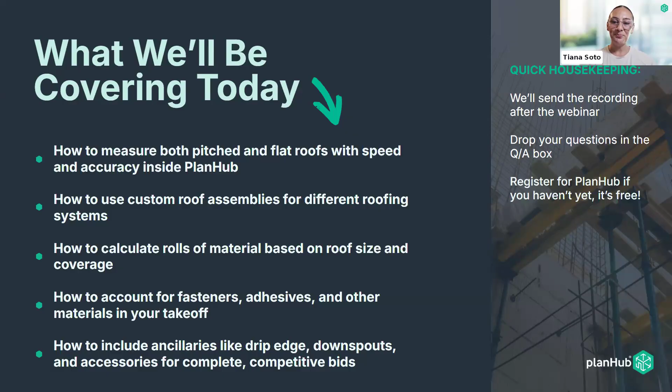So let's go ahead and get right into it, Greg. I'm going to pass the baton over to you. Thank you very much, Tiana. Just want to take a moment—if this is your first webinar with us, we launched a new series back in September, and she has brought so much creativity and energy to this process. From the adoption support team, we express our gratitude.

All right, let's get started here. I'm going to pop over—I've got a couple of projects pulled up. We're going to be focusing on two different areas, specifically for roofing takeoffs.

We're going to be looking at a low sloped flat roof. That's the plan page you see right here in the window, and this focuses on a convenience store. It does have a low slope—a quarter inch over a foot, pretty typical for a commercial flat roof structure. And it is going to receive a TPO system, one of the synthetic membrane systems.

We are going to be charging for and measuring numerous components of the system. For instance, we'll have to measure the main roof area for the overall cover board, as well as the ISO board to achieve that R38 insulation rating as requested by the plan.

Some other things we're going to talk about: we'll look at the different pages of the plans we need to reference for additional information. We may or may not need to measure directly on those pages, but they're critical in helping us understand the structure and how to measure so we can get our estimates done quickly and correctly.

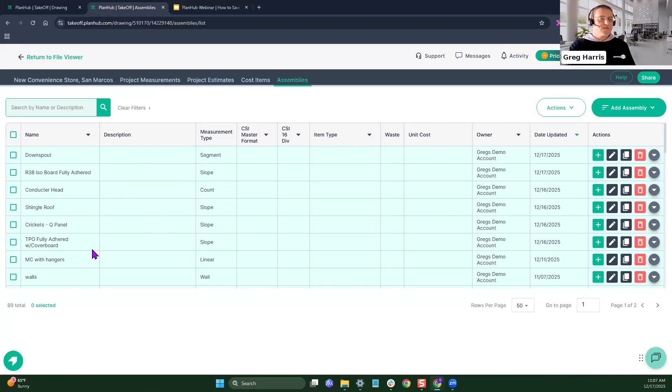We'll also help you with those assemblies. We'd love to get you started down that road—help you build them out, understand how and why the components are included. I've already got some built for this particular application. I'm going to pop over and give you a little preview. Our assembly library in this demo account is comprehensive, so we're only going to use about the first 4 or 5 assemblies on the list for this TPO system.

These are custom built ahead of time, and they do have the components in there. They're pretty common—if you're roofers and contractors, you're not going to be a stranger to the materials you see on this list. We're talking about the rolls of TPO, the cover board, the fasteners for it, and the plates, those little incidental components that have to be part of it.

Estimating those and performing takeoff to get the measurements for fasteners and plates, et cetera, is very time consuming. And if you're doing it by paper, by hand with a ruler and a pencil, oh my gosh, my heart goes out to you—I can't imagine doing it that way in this day and age. But I know there are still companies transitioning over, and they actually love the product when they see it because it's a huge time saver.

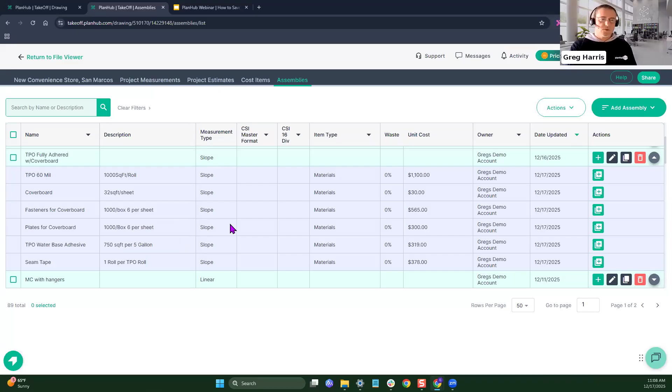It takes a little bit of effort up front. You meet with us, we talk to you, and we'll get you on board and rolling with the trajectory you specifically want for your company's goals. So specifically for this TPO roofing system, we're going to measure some very specific things. First off, we have to get a dimension of the overall surface area that's going to receive the main roof TPO.

That's also going to be the dimension that's going to be receiving the cover board and the ISO board that will achieve that R38 as requested by the project.

On that same surface area for the entire main roof, we can also calculate the amount of seam tape we need for joining these rolls of TPO when we have to stretch out multiple rolls together. You got to seam tape it. We also have adhesive for all those edges and up to parapet walls and things. This one is fully adhered, so the adhesive is actually going to cover the entire surface area. So again, that one measurement we're going to perform, we're going to calculate multiple materials off of that same measurement. There'll be others we need to perform along the way.

We also need to charge for the conductor heads for the scuppers that are going through the wall to catch that water off of these crickets toward the back of the building. We also have downspouts connected to those conductor heads. We're going to need to charge for those as well.

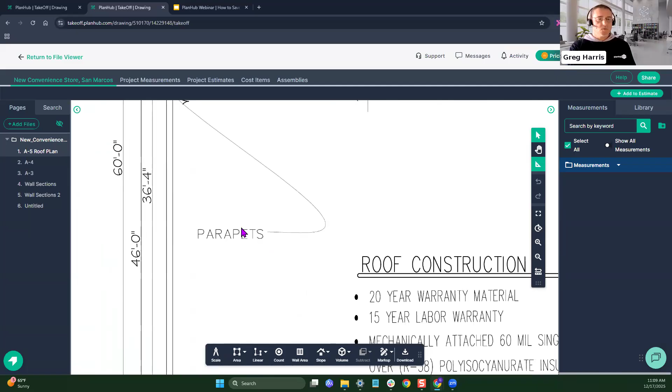Another feature we have to be concerned about is the parapet walls. If I zoom in here, you can see that every wall is marked as a parapet wall, around the entire structure. We move around it, every wall is a parapet. So commonly we have to be concerned with the heights of these different parapet walls, and it is common to have different heights of those walls on the same structure. You can have them anywhere from 12 inches tall all the way up to this one.

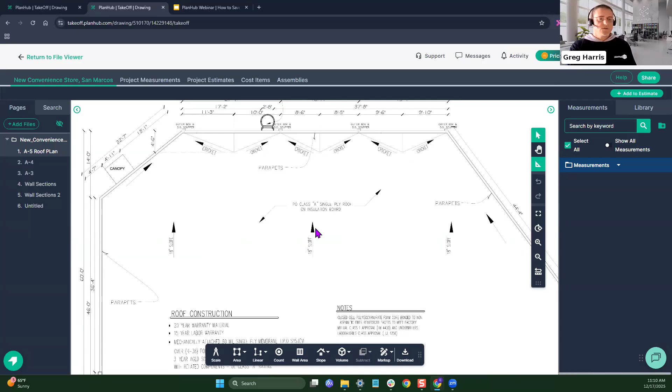Actually, the tallest is 9 feet, I believe, and I've seen it all the way up to 20. So it can be many various sizes, and we can accommodate those sizes in the assembly with you. We can build in multiple options for different parapet heights, so they'll all accumulate in and give you one sum total of product. That's the goal: take a measurement, get the measurement pushed through the assembly, let it calculate the conversions for you, and then return quantities of products and prices of them because we've already programmed this ahead of time.

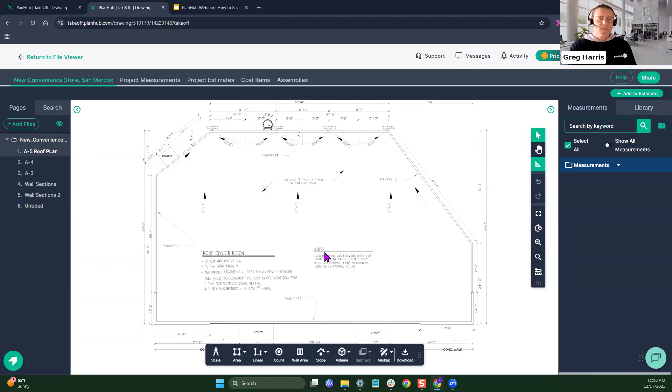So for this example, we're going to get started measuring right away. First thing we have to do on this page is find the scale printed by the architect. This roof plan says it's 1 inch equals 6 feet. That's a very odd scale on this particular roof plan.

Let's double check down here in the title block. Yep, it does not address scale there. So we're going to be going directly off of what the page is printed at. However, that being such an unusual scale, I'm going to calibrate a scale to a known measurement instead. I'm going to choose this 11-foot measurement right back here. That dimension line is 11 feet between these slanted hash marks.

And we have a tool down here on the toolbar. That scale button is the first one, so I'm going to click that to get started. If this were a common scale that we could find on any plan, we would just simply click the menu, scroll up or down and find the scale that matches and select it with a click, then verify it with a ruler to make sure it's accurate for the page.

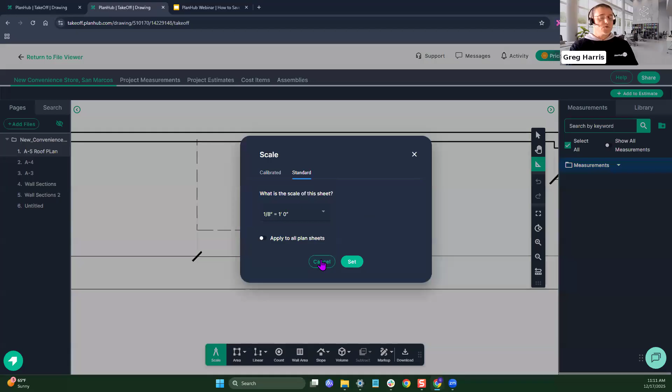In this instance, though, this is an unusual scale, so I'm going to go straight to calibrated. I'm going to tell the box here that I'm going to draw a reference line that is 11 feet long, because that matches that known dimension behind me on the page. Then I click set to get started.

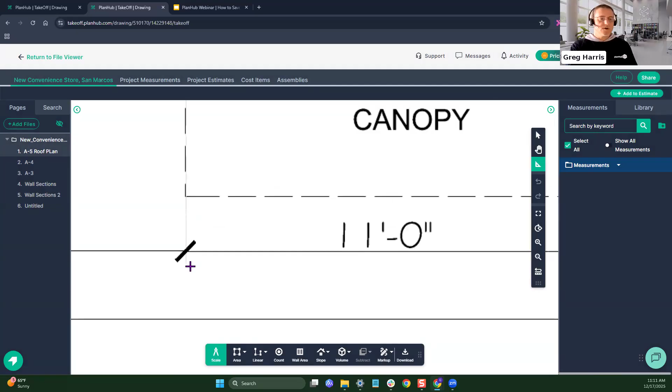I'm going to get a crosshair for my cursor, so I'll line that up with the beginning point of this 11-foot measurement, center my cursor on that line and click one time. That now follows me in whatever direction I go. I'm going to move straight to the right, dragging that page with a right click and drag on my mouse. When I get over to the endpoint, I'm going to make sure I've got it lined up in the center and click again.

So that calibration line, when you click to start and click to finish, sets the scale with this being the definition of 11 feet in pixels to the computer. It can now convert any other measurement we perform using that same conversion factor calculated off of this calibration. Now, to verify the accuracy, you could use the same measurement. That green line's in the way just a little bit, so I'm going to scoot around.

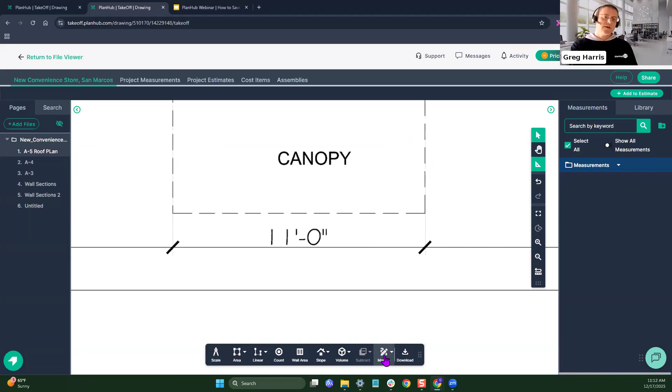Let's find, there's another 11 foot right there. I'm going to use this clear 11 foot to verify, and I like to verify using the ruler tool. That's a dimension drawing tool that's buried in the markup button. So I'm going to click there and then click ruler to launch.

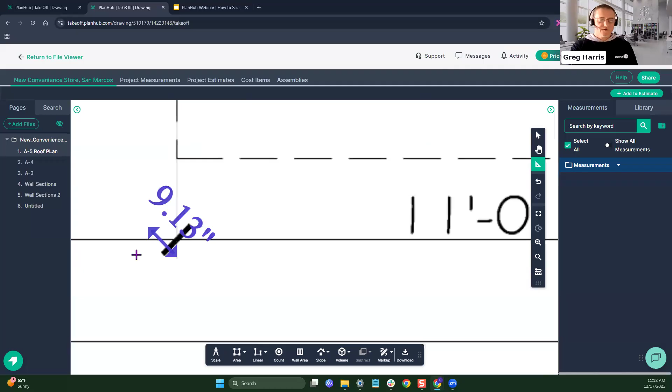I'll get a crosshair from my cursor again, and I'm going to do the exact same procedure I did for the calibration line. I'm just going to center on the beginning point and click once. That follows me now, so I'm going to move straight across the page to the right, clicking and dragging with the right mouse button as I go. And then when I line up at the end point, I click again.

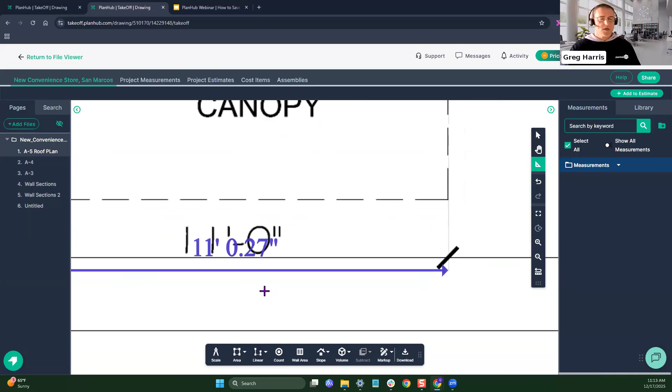And we're within a quarter inch over 11 feet. Honestly, if you're within an inch, that's good to go because that could just be quibbling over where you began and ended on the beginning and end point on those lines. So if you're within an inch, you're good. If not, you might want to recalibrate, choosing another known dimension, maybe a little longer, to try to get it zeroed in even closer. That is good to go for our purposes, so we're going to leave it set exactly as that.

So now with the list of measurements we're going to be measuring for, number one is that main roof area. We're going to be using the slope tool. It is a tool that is designed for roofing applications. If I open it up by clicking slope, you have options of how you can use it.

Line is for if this were a sloped roof, and we will be using this line later over on the sloped roof asphalt shingle project, because that has some ridge caps, and those ridges are going straight up that 6:12 roof pitch. So we need to add that dimension into our slope tool so we get an accurate measurement instead of the 2D measurement. It allows for that third dimension of the rise over run.

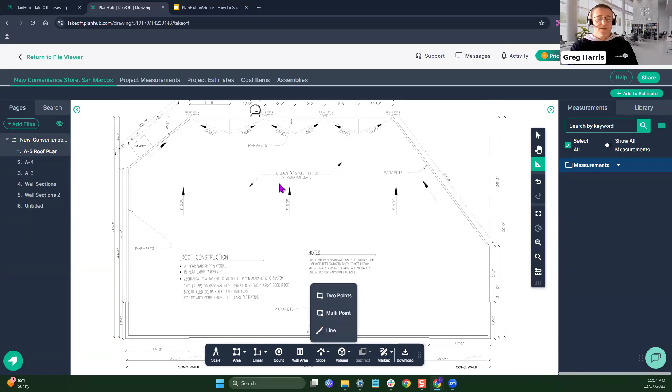We will be using the multi-point for this particular plan because it is not a square or rectangle. The 2-point, by the way, if you do have square rectangle buildings, you can measure the area with just 2 clicks. It's that simple. This one is a little odd shaped, it is not a square rectangle, so we're going to go to multi-point and click there.

Next, we're going to name the tool. I'm going to call it main roof. Oops, actually, I'm going to change that. Let's call this TPO system. The reason I'm naming it TPO system instead of main roof is because this, when we use it with the assembly in a moment...

That assembly header is going to pick up the name of the measurement we choose to begin to launch that assembly with. So I'm going to name this tool something that I want to see that assembly named in my estimate page later when I use it. So I'm already thinking ahead about how I'm going to use my assemblies, what measurements are contained within them.

As you're probably picking up on it, getting those assemblies built out ahead of time is a huge time saver for you whenever you use them in a project. But that assembly is sort of driving my trajectory, or driving the direction I'm going to go with my measurements. So I'm going to call this TPO system.

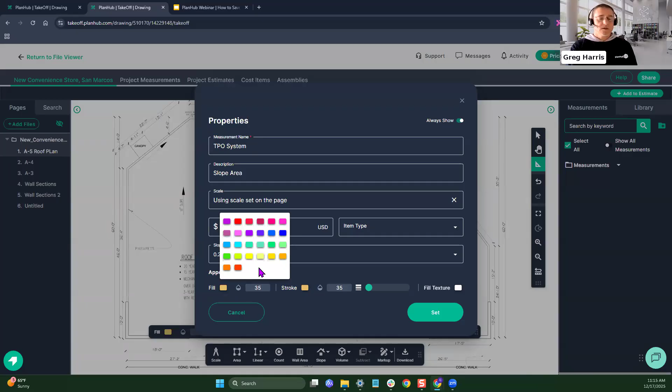I'm going to drop down to the slope factor box, click there, scroll all the way up, and this is a 1/4 inch over a foot, or 0.25 over 12 slope for this particular one. I can also check my colors here in the appearance section. You can click the box and choose any other color from the palette. I like to choose nice, bold, bright colors that are easy to see while I'm working. And this orange is going to be very nice for us.

We'll be able to see it, so I'm not going to change anything there. So really at the end of the day, to get started, I name the measurement, chose my slope factor, check my colors, and then click set. Now we're ready to start measuring.

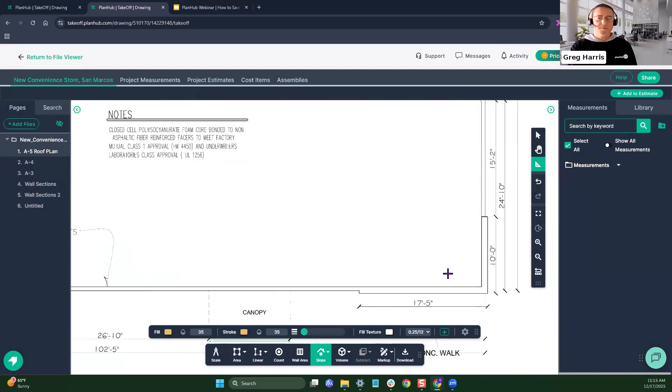I have a crosshair for my cursor again. I'm going to pick a corner to begin, line my cursor up right in that corner, and left click one time. That starts me off. I'm going to zoom in so you can see that line right there.

Let me go ahead and turn that up to 100% opacity. Actually, the fill is fine. Let's go with 100% on the line. That'll make it much easier to see here as we work.

So I'm going to start at that corner again and click once. That line is much bolder now. You can change that appearance at any point while you're in the middle of measuring or afterwards by reopening that properties box. I think it's good for us now.

We can see it. So after that initial left click, I'm going to move straight up this page. I'm going to drag the page down with my right click and drag, and I'm going to use the mouse also. The scroll wheel in between those buttons will allow you to zoom in closer or move farther away as you're working.

I'm going to move right up the page, and we've already got a little bit of a speed bump to cross over here. As I try to follow this angle that the architect has drawn in, my line doesn't want to go there. It'll go before it or after it, but it doesn't want to copy that same direction. So all we have to do is just hold down our space bar. That allows free form line movement to any angle at all.

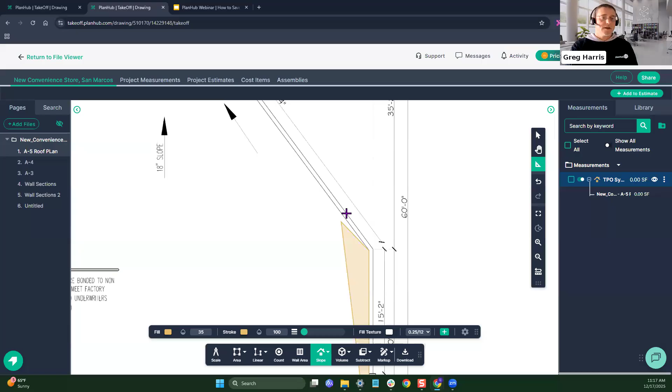We start out with the snap to angle feature engaged by default. That allows us to stick really closely with the 90-degree angles that most buildings are drawn. However, this one's got this odd angle at the back, so hold the space bar down. That lets me trace any angle that we need to follow.

Drag the page up and then left click when I get to the next direction change. That left click pivots again, so I can follow the back wall there. Click at the next direction change. Hold my space bar for this odd angle. Click at the corner. And as I go down the roof, I'll double click here at the final point because that finishes the entire roof measurement.

Over on the right side, we have 5,391.18 square feet of roofing material. But that's not all, folks. We also have that parapet wall to consider.

Anytime you have a parapet wall in a project, you're going to need to allow that TPO to go up that parapet wall, and it depends. Some parapet walls require it to go all the way to the top and then cross over the top so that you create a seal underneath the metal coping that's going to sit on it.

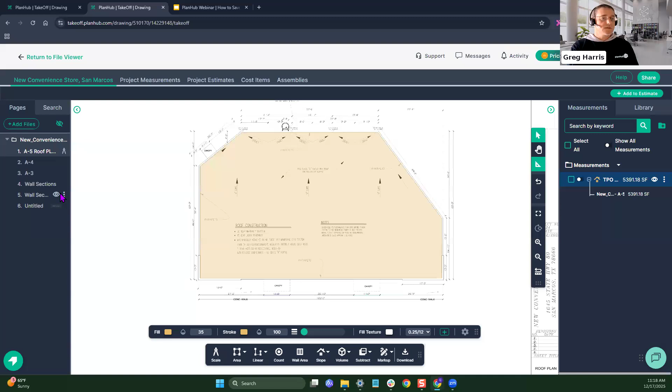This particular project, though, I did bring in some extra pages. We've got our roof plan here, but I also brought in the wall sections. Over on the left side of the page, you can see the contents. I'm going to click on page 4, which is wall sections. Zoom in here so we can take a look at what that interior of that parapet wall construction is going to be.

And I've underlined a little hint for us. It's going to receive a metal roof flashing, and it shows to be 24 inches tall from the finished roof up to where that flashing is going to seal the top of that TPO against the stucco wall that's inside that parapet.

That's important because we now only need to calculate the additional TPO 24 inches tall around the entire length of the building. We have a tool that will do that for us off of this top-down plan, and that's the wall area tool. So I'm going to go down to my toolbar and launch wall area.

And I'm going to name it first. This is going to be parapet area, so I remember what this measurement represents. And then we have to address the wall height right down here in the center of the box.

This tool, by the way, is designed for the folks who typically build interior light gauge metal framing or wood framing, but they're building walls. They're doing drywall and all that stuff. So down below, we've got tools that will calculate drywall sheets, studs, even CMUs if you're bricking or blocking an exterior wall in a building.

We're going to be just focusing on the area that we can measure on this top-down two-dimensional plan. We're measuring the wall we can't see, so this wall will also do that surface area of what we can't see. We just need to tell it how tall up that wall to measure or to calculate.

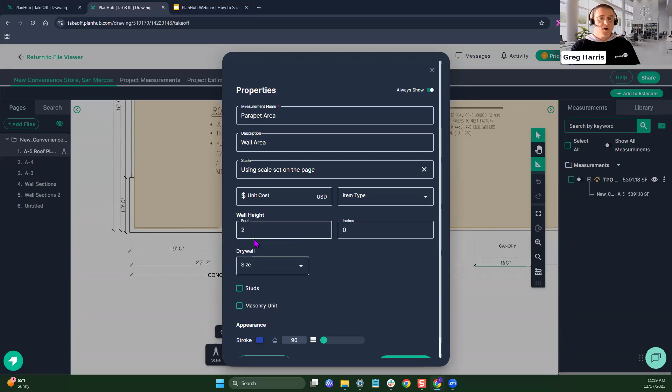This is easy for us. The plan calls for that flashing to be put at 24 inches all the way around the parapet, regardless of how tall the wall is. So I just need to say 2 feet right here in my wall height box. Then I'm going to go down to the bottom right and click set.

To measure the length of the parapet, I'm going to measure again the exterior perimeter of the building because this parapet wall does extend all the way around. So I picked a corner to start, left clicked one time. Now I'm going to drag this across, zoom out so I can cover a little more territory a little quicker there. Click again, click again at the angle.

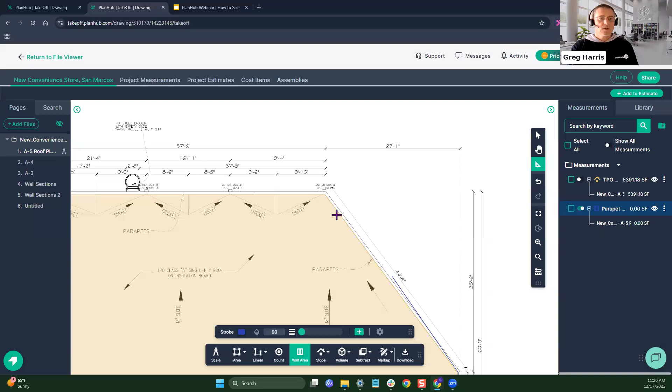I already know I need to hold my space bar here to match this odd angle. So I'm going to hold my space bar, click at the corner. Everywhere you see me pause, that's a single left click to change direction. Hold the space bar if it's an odd angle. And then I'm back around where I started to terminate this section. I'm going to double click there. That's the entire roof outlined.

And we ask it to calculate the surface area if that wall is 2 foot tall over on the right side of the page. There it is, 589.03 square feet. That's the additional amount of surface area of TPO membrane we need to calculate for our estimate, because we're putting TPO on the main roof and up that parapet wall on the inside.

So when we use our assembly in a moment, we will need those two quantities, and the assembly is going to take care of adding them together and converting them into rolls of material.

All right, so next up, we've got that parapet wall measured at 589 square feet. But if we open up below, it does provide you with a length measurement because it's showing you the calculation of how it achieved that surface area up above. We measured 294.51 linear feet long at a height of 2 feet.

So that 294.51, that's our total length of coping that's going to go on top of this parapet wall. We can use that directly off the measurement to calculate the amount of coping material in a moment or two when we use the assembly. So that's one measurement we don't have to do twice - it's already calculated for us.

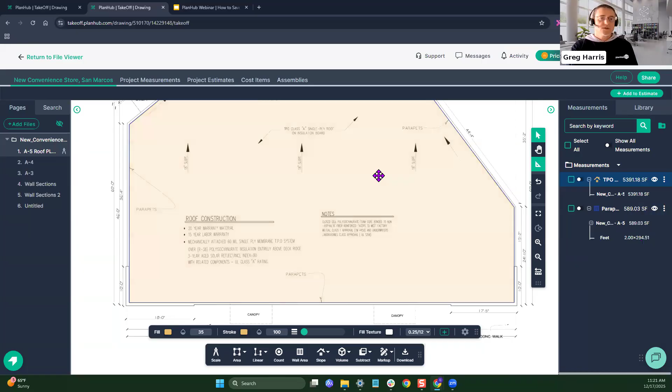Next, let's talk about our sloped ISO board. So we're going to have to put some slope board where these crickets are drawn out for us, to make sure that that water gets diverted over to those scuppers or those conductor heads and flow down the downspouts correctly. So we do need to measure the surface area of these crickets.

To do that, we're going to stick with the slope tool because they're also getting a 1/4 inch over a foot slope. We want to make sure we estimate enough material, so I do want to include that slope in the process. What's nice about that slope tool is, if you're a roofing contractor, you can use it for almost everything you do. There'll be a couple of exceptions we'll look at in a moment over on the shingled roof, where we'll switch over to a linear tool to achieve that true flat measurement. But the majority of the time, you're going to be using the slope tool, whether it's a flat roof or a very high slope roof.

This one is our cricket area, so I'm going to label it as such in the name. Then down below, the slope factor - we're still focusing on that 0.25 over 12. Next, the colors are bright, easy to see, so I click Set to get started. Measurement technique is identical: pick a point to start and click once. That follows your mouse now, and this angle follows very well. There's that 22.5 degree jump, but this angle right in the center is following perfectly. So I'm going to click there at the peak of that triangle, let it come down to the other side, and double click to finish.

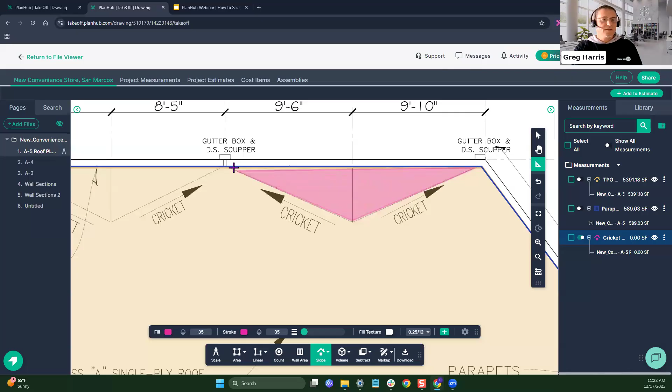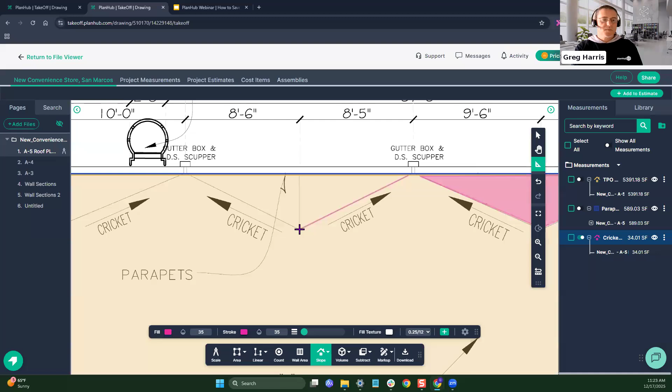I'm going to move over to the right. We have more sections to measure with that same tool, and I want one grand total of the cricket area. So I'm going to move over to the result on the right side of the page, and here we have a continue switch. If I click that, it turns the tool back on, so now I can click to begin the next measurement. This one's a little odd, so I'm holding my space bar as I click, and down the other side, holding the space bar again, and double click to finish.

I'm in continue mode now since I clicked that switch, so it's going to stay active for me. I can just jump from one section right to the next - I don't have to keep turning that tool back on every time I need to move on. Then there, the double click will end that section. I've got all three of the crickets measured.

There are no RTUs here, so we don't have to worry about any rooftop units like air conditioners, etcetera. They're all ground based, so we don't have to worry about that here on this rooftop.

If we did, I would continue the measurement and measure the crickets that would precede those rooftop units to direct that water flow down to where it needs to be draining.

Over on the right side of the page, since I did continue this measurement, I'm going to need to turn it off with the same switch that I used to turn it back on. After you do that, you're ready to progress on to the next measurement.

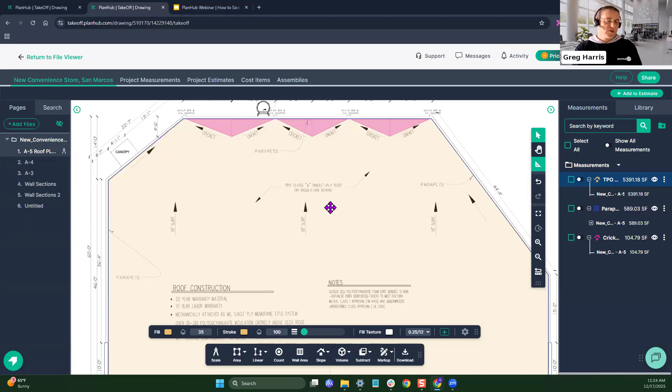Next is going to be walk boards. We don't actually need those for this particular application. If we did, I would stick with the slope tool. I would create a new area called walk boards, because this job—or we could use the example of using the sheets of walk board that you can buy, 2x2 or 2x4 squares. Or if you do rolls, you can measure the linear distance and calculate the number of rolls for the material. We could do it either way.

For this particular job, the walkboard's not included, so we're going to move right on to our scuppers or conductor heads. We need to count those so that we have a launching point to send a measurement through our assembly so it can calculate the prices and the costs of those.

So to get started, I'm going to drop back down to the toolbar. This is one of the exceptions where you'll jump outside the slope tool because we need to perform a count. So I'm going to click the count tool right down at the bottom to launch that.

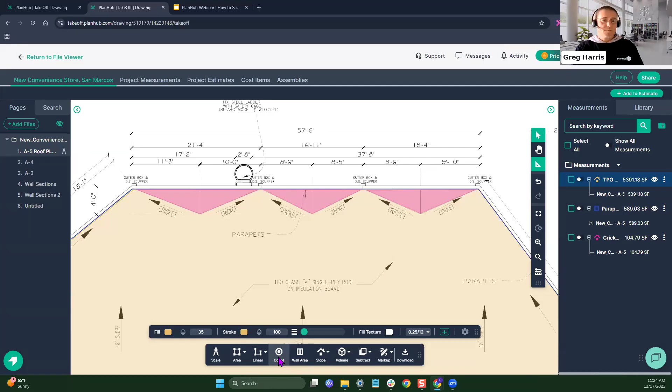I'm going to give it the name—you can call it scuppers or conductor heads, whatever you guys call it on a regular basis—because when you're using this to measure your own roofs, this is for your benefit. You want to be able to easily see it and recognize what you're measuring. So you do not feel compelled to use the terms I'm using. Use whatever you guys use on a daily basis.

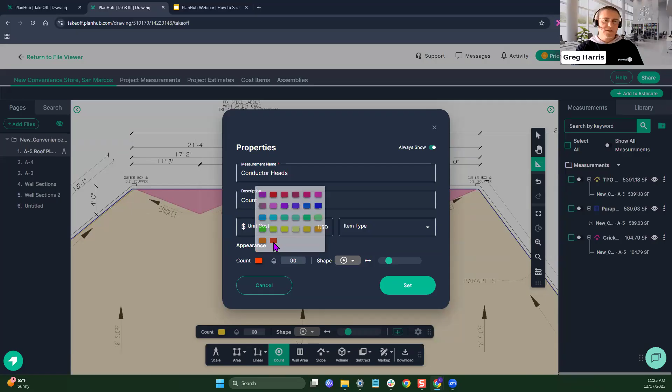I'm going to change that color though, because that yellow symbol as it's stamped on the page is not going to be very bright or bold. So I'm going to make that a bright red and click set in the box.

Next, I'm going to hover my mouse over every scupper head and click once. That symbol is going to be dropped right there on the page where I click. Over on the right side, I don't have to keep up with how many times I'm clicking because the system is doing it for me. I click 4 times, it's got a total of 4 over here on the right side in the measurements panel.

That gives us a launching point again so that we can calculate the materials, or if we purchase them pre-constructed, the price and the quantity of those that we need. Now, we also know that those scupper heads are attached to downspouts, so we need to get a total length of the downspouts.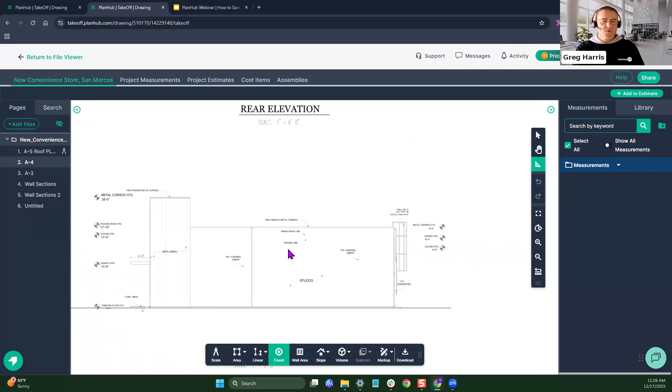So hopefully we have a known measurement we can calibrate with somewhere on the page. Just panning around to see if there's any known measurements. There's a 5 foot right there. So I can use this 5 foot, or I could use the canopy height at 10 foot. Either one of those is valid to calibrate the scale.

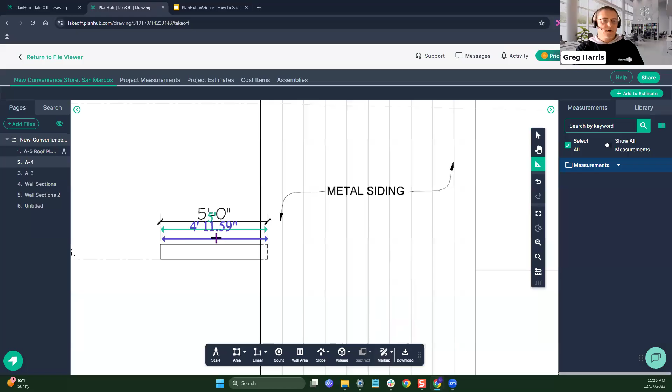Now what we need to do is find out the length of these downspouts so we'll know how much material to charge for. They come in designated sections, so we may need 1, 2, or 3 sections to complete the downspout depending on its height. So I'm going to get the total length of these downspouts, all 4 of them combined.

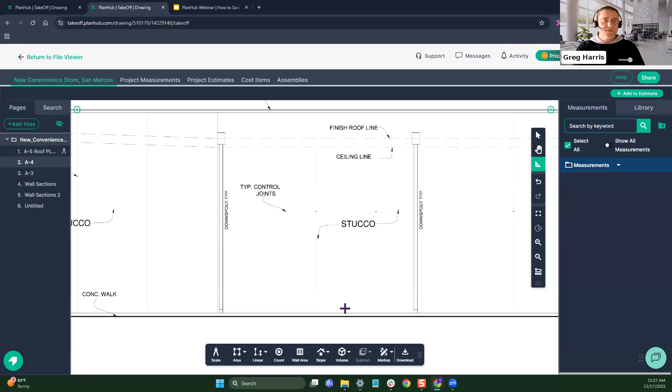We're going to do that with the segment tool. I'm going to drop down to the linear button. There's a segment tool here, and it will have a start and a stop. It does not turn corners, which works perfect for these downspouts because they're not changing directions. So I'm going to click segment.

I'm going to give this the name downspout length. It's got a color, easy to see, so I click set to start. Now I'm going to click at the bottom, move straight up, and click at the end. The segment tool is always in continue mode because it only takes two clicks to perform it.

So I'm going to move to the next one and click again, move right up to the top, and click again. Every time I click, it adds the result to the previous measurement. So for those two so far combined, we're at 31.52 linear feet. Click again and add this one in. It's going to add another 15 to 16 feet to it. So now we're up to 47.

And we expect another 15 or 16 feet for this as well. Click to start, click to stop, and we did. So we're up to about 63 linear feet of downspout material.

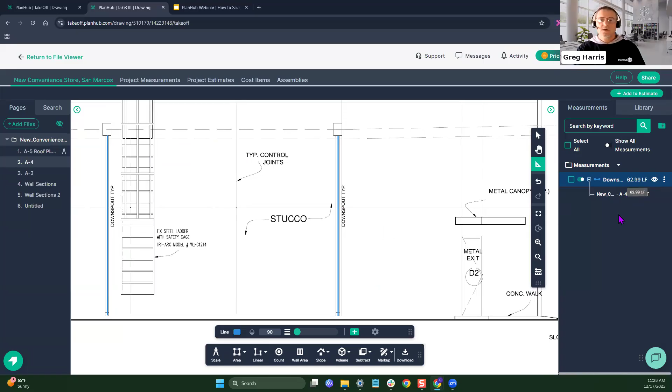All right, moving right along. That is the final measurement that we need to achieve. Let me see what that result was.

I can also, even though we're on the page with the main roof, because this is where the majority of our results are, there is a show all measurement switch over here in this panel. If I click it, I'll be able to see that downspout distance right there. So I don't have to remember it when I'm using the assembly, I can just look at it straight right here off the page.

But let's get started with the assembly now. That's it for the measurements we need for the TPO system. Pretty straightforward, this is a simple plan. I get that, but for the time allowed, I didn't want anything too large or complex because I wanted to cover all the principles that we can. And that is the measuring part concluded. We've got all the dimensions we need.

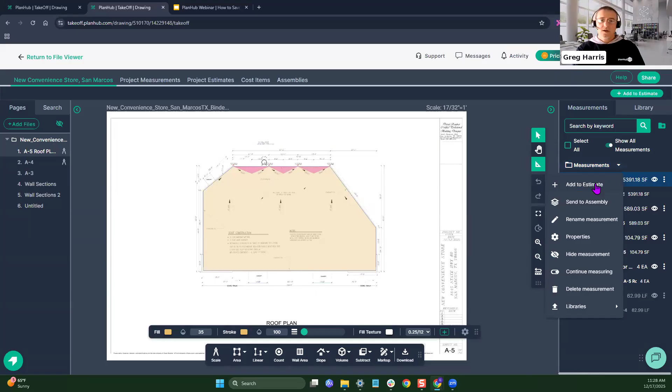So I'm going to get started with the assembly by choosing the measurement I want to start with, which is the TPO system. I right click there. The second option on the right click menu is send to assembly. I click to launch it. Next, all the way at the bottom, I did add a new one right here, TPO fully adhered with cover board, which is exactly what we need for this roof. So I click to select that assembly.

Next, I'm going to tell it what page of the estimate to drop into. We only have a single page created, so I'm going to drop the result right there in that page and then click add. Next, this box will open up for a couple of purposes. Number one, it's going to show you this is the measured territory you're pushing through, is that what you want to use? If it is, we just accept it the way it is. And we also need to address the other fields.

The parapet area was done with a different tool, so we can't pull those in at the same time, meaning we're going to have to look over and manually type that parapet area. Over on the right side, that parapet area is 589 square feet, so I'm going to type 589 right there in the box. We also have the walk pads, which is 0 in this particular case because there is no walk pad for this one. But that is the adhesive, and that's the TPO water-based adhesive. We don't need to add any extra to it, so it's pulling in the dimension right there.

Then we click insert. That's going to force all of those quantities through that assembly, through the formulas I've attached to them previously, and we're going to get a result right here dropped into our estimate.

This is only one assembly so far. We're going to be using a couple more for this TPO system, because if we open up the result of this assembly, you'll see right away there's the name of the system as TPO system. That picks up the name of the measurement. That's why I gave it that name, TPO system, instead of main roof or something else.

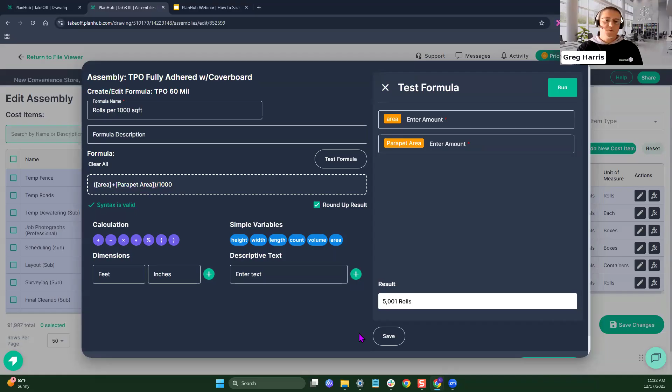So if I save that and apply it, save changes, now we'll pop back over to the estimate. I want to delete out the previous assembly we used that has the incorrect quantity on it. Then we'll pop right back over to that takeoff and repeat that process.

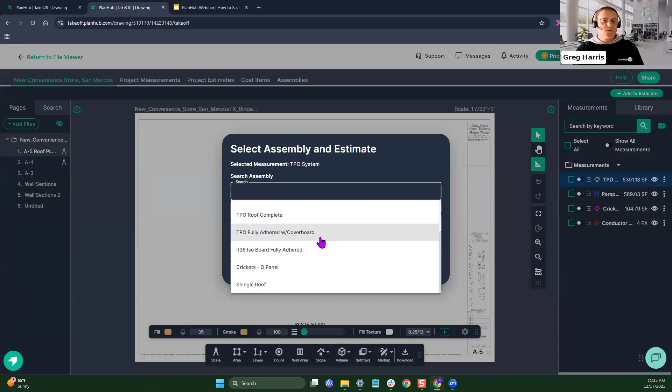Right click on the result we want to send to assembly. We're going to choose the TPO fully adhered with cover board, drop it in the same page, click add. Our parapet area, we're going to round that up to 590 from 589. There we go. Then write down the walk pads—that's still 0 because we don't have any of those for this job.

Now we're going to pop over to the estimate, and hopefully we won't see 5,000 rolls of TPO any longer. Perfect. On the estimate page, when this loads up, we'll expand it out on the right side. And now we're at 6 rolls of TPO—much more believable for this job. Cover board, we're at 169 pieces.

If we scroll over to the right, you can see more information about each item. The TPO, for instance, is calling for 6 rolls at $1,100 per roll, so I have a grand total of 6,600 for the TPO itself. Next is the cover board—we need 169 pieces at $30 a piece, so that's another $5,070. And you can see on down the list, we're also calculating the fasteners for the cover board at their coverage rate, that's per box. So this is 3 boxes of fasteners and 2 boxes of the plates.

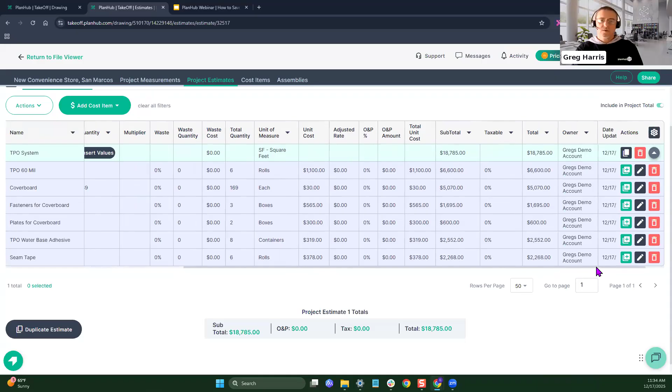Next, we've got the TPO water-based adhesive. Those are 5-gallon containers—if I scroll over, you can see it covers 750 square feet per 5-gallon container there in the description. We need 8 containers at $319 a piece, so about $2,552 as the total for that. Seam tape below, we need 6 rolls, and that converts over to a price of about $2,200. Up top is the grand total for the TPO system alone, $18,785.

But we're not done yet, we have more materials to estimate. We've got the dimensions for it. So up top, we're going to go over and click the takeoff button, come right back over, and we need to calculate the additional sloped ISO for the cricket area.

So I'm going to right click on crickets, send to assembly. Scroll to the bottom, and right there is our Cricket's Q panel. Select it, drop it in the estimate, click add, and additional information. Are there any RTUs? There's not, so we're going to put 0 in. It'll just calculate that Q panel based on the 104.79, that's the dimension of the area of the crickets. We'll click insert. Next up, we've also got the conductor head and downspout assemblies we need to use.

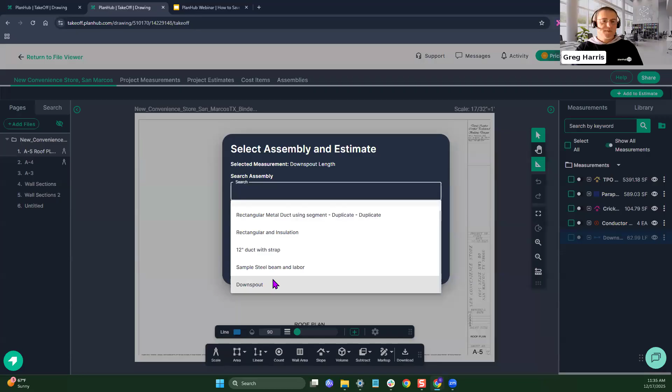So I'm going to stay right here and right click on the conductor entry, send to assembly, scroll down until I see conductor head, drop it in the same page, click Add, and approve what we did. We counted 4 and it's showing 4, so that's correct. Next, I'm going to show our measurements again to get that 63 foot length, the combined total for our downspouts, and right click on that as well, send to assembly. All the way at the bottom there is downspout. Click to select the page I want it to fall into and click insert.

Next, we're going to pop over to the estimate and take a look at what all those assemblies did for us. This is a very simple job, not a lot of bells and whistles involved. It's coming out to about $25,600.82 for the grand total of the materials on this job.

I didn't add labor into the assembly, but you absolutely can. Whatever your labor rate charged, either by the square or by the square foot, or if you did by the roll of TPO, however your company charges, there are several different ways contractors can do that to accomplish the total amount of labor they need to bill for. So however you do it, we'll be happy to build that into your assembly. But our grand total here for all the materials combined, that's that 25,600.82 you see right up at the top.

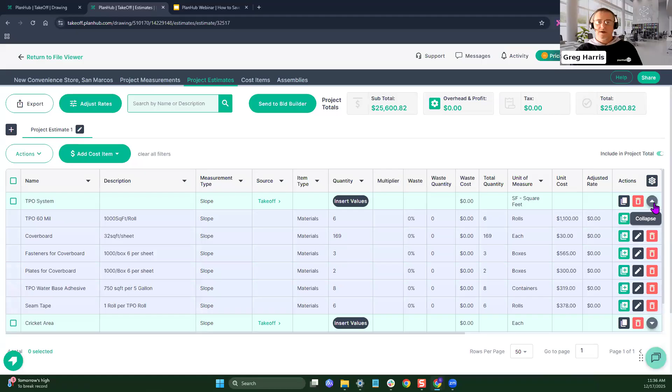So that's it. We've had the 4 assemblies built out ahead of time, and that took a total of about 20, 25 minutes to both measure and estimate out the entire job.

So let's switch gears and pop up top. I'm going to switch tabs and we're going to go look at the sloped roof. This now is a 6/12 pitch, and it's getting an asphalt shingle.

Let's see here. So the measurements we're going to need to achieve to get the total materials we need: first, we're going to be measuring the dimension of the square foot area of the main roof. We'll be using the slope tool for that, just like we did over on the TPO system, and we'll set the pitch for this. We'll also be measuring the drip edge, which is going to be the entire perimeter around this roof, and the ridges, where we're measuring all the ridges for both hip and ridge shingles.

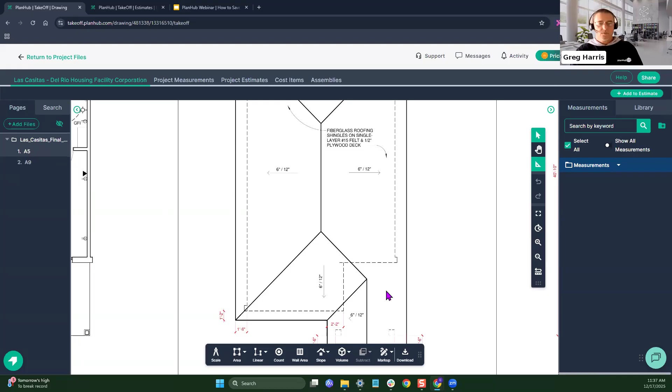And of course, we need our valley tins and our drip edge. So a few different measurements we're going to be performing on this plan.

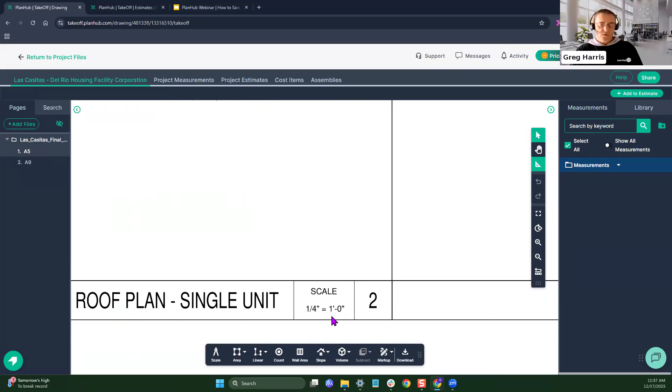First thing we have to do, you probably already guessed it. This has a common scale for this drawing, 1/4 inch equals 1 foot. So I'm going to drop down to the scale button, choose the standard scale, let it sit on this page. I'm just going to click that menu, scroll down to find that 1/4 inch equals 1 foot, click it to select, and then click set in the box to commit to the page.

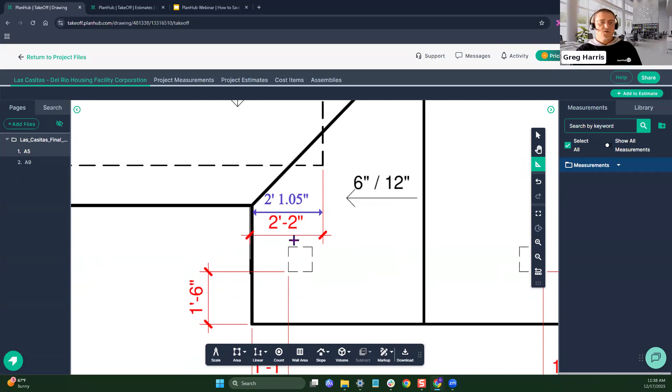Very next thing I'm going to do is find a known measurement like this 2 foot 2 inch, click ruler, and verify the accuracy of that scale. Right there, about an inch off over 2 feet 2 inches. And I was not careful at all of where I started and stopped that — it actually looked like I stopped in the center and then went to the exterior of that wall. So that would definitely make up that extra inch.

We're within guidelines, so we're free to move forward and get the main roof area. So the main roof measurement here is going to be identical to what we did over on the TPO or flat roof system. I'm going to drop down to the toolbar and click slope. Next, we're going to start a multi-point again because this is not a square or a rectangle.

One other feature of the slope tool — I'm going to call this asphalt area. It doesn't matter how many sections; we've got numerous hips, ridges, a couple of valleys there in this roof. Doesn't matter, they all share the same slope factor, so you can use one tool to measure the entire thing at the same time. You don't have to break it up.

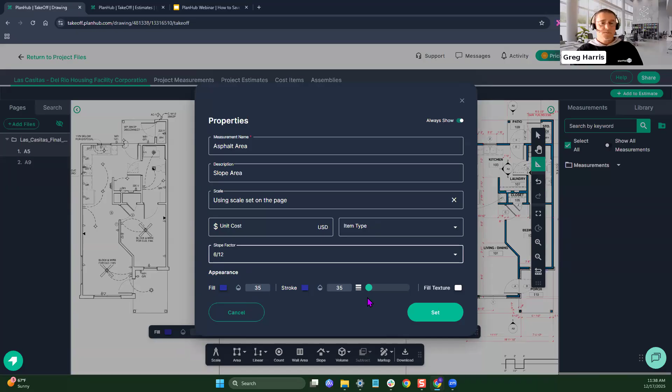It is all 6/12, so I clicked in that slope factor box and I'm choosing 6/12 off of the list. The colors are going to be easy to see. So next, I click set in the box. I'm going to pick a corner to start, just like before. Click one time at that corner — that begins the measurement. Move straight up the roof.

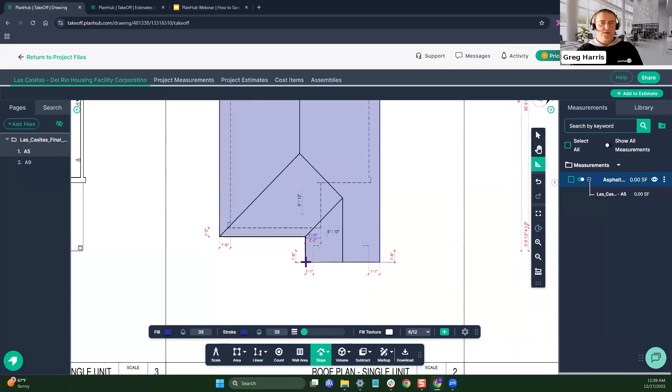I'm going to zoom out so I can see the majority of the roof and get my way around it a little quicker here. Left clicking at every corner, exact same procedure as what we did on the previous page. When I get back around to where I started, I'll finish the shape with a final double click to end the measurement. On the right side, we've got just over 978 square feet.

Next, let's get our dimension lines for our drip edge, our ridges, and our valleys. Our drip edge is on the true flat part of the roof with zero slope, so this is one of the deviations. We're going to move away from the slope tool because this measurement truly has no slope attached to it, so I'm going to go to the linear tool and start a line measurement.

Actually, I need to verify with my assembly first because I have a drip edge assembly built out—did I put it in? No, I put it into this shingle roof. With the TPO system, I had the main TPO roof assembly built, but then we had other incidentals like downspouts and conductor heads, items that may vary by project. They're not included with all, but they may be with some, so I included those as separate assemblies we could use if needed. With the shingle roof, though, I piled everything into one to show you that you can have a single assembly that's comprehensive for this full application.

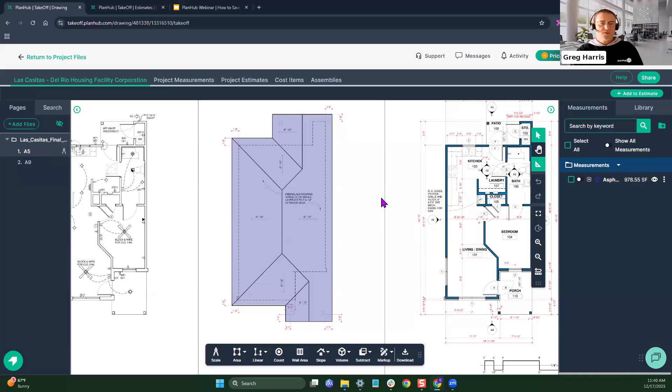In order to do that, you need to take a linear measurement around the drip edge because we'll need that dimension when we use the assembly. So I'm going to click linear line and name this tool drip edge—an obvious name that will remind me exactly what I was measuring. I don't care for that particular color, it's very close to gray, so I'm going to click that box and choose something brighter that's easier to see, and click set.

Now I'm going to trace out the perimeter of this roof, clicking one time at the edge, at the corner, and then every other corner as I go around. As I get back around to set the final point, this tool changes direction, so that's a double click on that point.

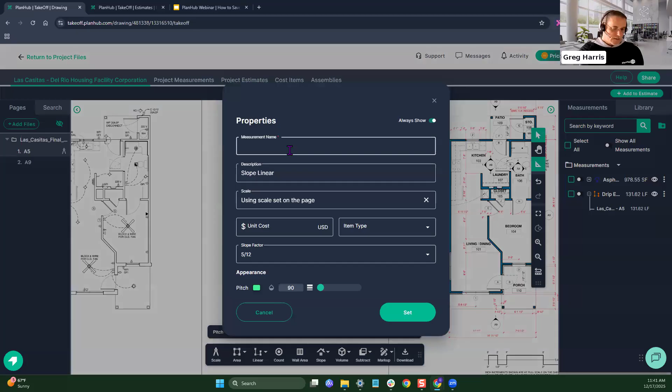Next we need to get our ridges and our valleys. This plan has a valley right here along that line, and we have ridges and roof caps on the rest of them as well. We're going to be using the slope tool because these do slope, so I'm going to drop down to the slope line version. This is going to be for valleys—I'll label it valley and give it the slope factor 6:12, then click set.

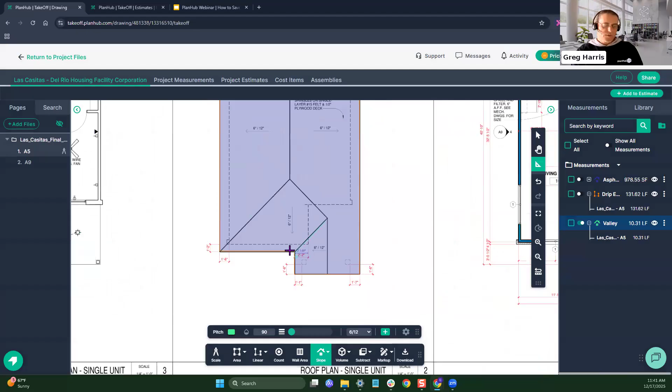To measure with the line tool in the slope, we just click one time to start, and just like the linear tool, it follows me whatever direction I go. I'm going to head straight up the line, double click at the end. There's another valley toward the front of the building, so I'll move over, click the continue switch to turn the tool back on, click to start, hold down my space bar to follow that angle, and double click at the end. Our grand total length of all the valleys for this project is about 18.2 linear feet.

Need to do the exact same thing to measure all of the ridges and hips. I'm going to move back down to the linear tool and start another line measurement. We're going to call this one hips and ridges—nice bold color, click set.

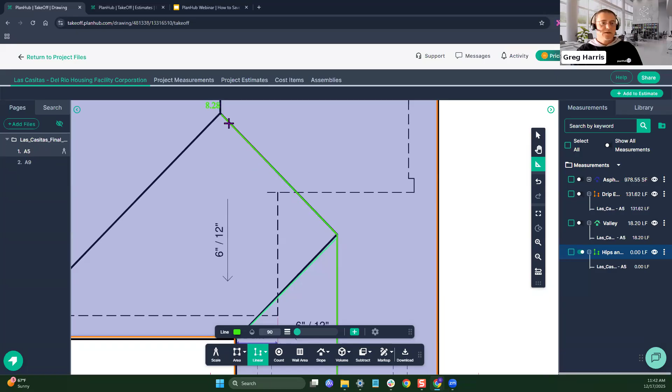As you're probably already figuring out, these are very repeatable processes. That's part of what makes this so easy and quick to use—once you get your core group of assemblies set up, you're only having to address the exceptions after that. You can go through one of these, and like I'm talking as I go, it's really a lot of muscle memory performing the measurements.

This one changes direction and needs extra sections, so I'm going to continue over on the right side. Click to start, click around the corner, and follow that ridge all the way to the gable end, double click there to terminate. One more little ridge here to catch—or this is a hip, I suppose.

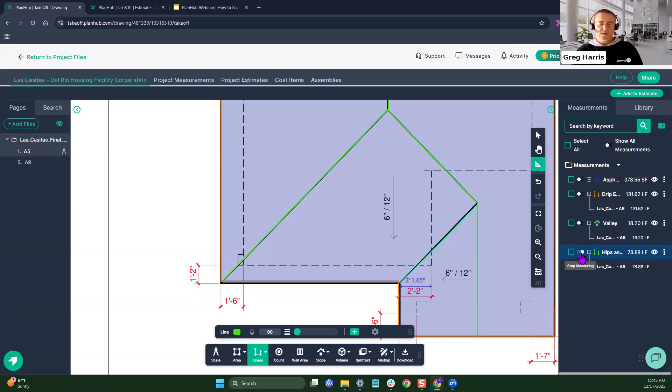So I'm going to click there to start and double click to finish. Now our grand total for our hips and ridges is 78.88 linear feet. Since I continued it, I need to click that switch to turn it off. Okay, there's no gutters or downspouts on this plan. So that really does represent all the measurements we need for all the components.

So let's get started. I'm going to move over to the right side on the asphalt shingle area. I'm going to right click there and send to assembly. I'm going to scroll to the bottom so I catch my new ones. There's my shingled roof I added for today's project. And by the way, I added these for today's project so they would be very specific as examples I would explain to you as we go.

But for you guys, you build the assembly once for the shingle application. It's in your system until you change it. So whatever job you come to that needs a shingle roof, you just recycle and reuse those exact same assemblies.

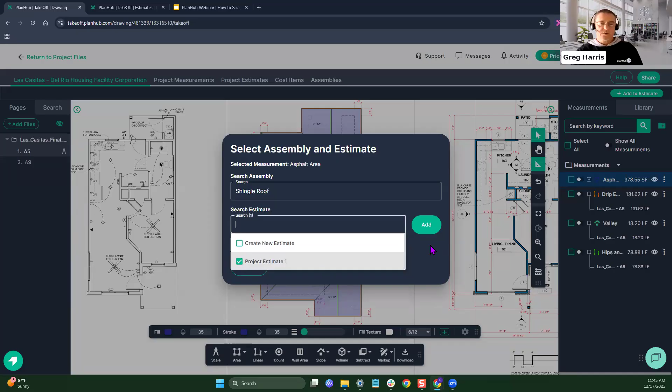All right, here's our extra info that we need to add. Number one is the hip and ridge length. Over on the right side of the page, that's about 78.88, so I'm going to round that up to 79 feet. Then all the way at the bottom we've got our valley flashing there. Over on the right side, that's 18.2, so I'm going to round that up to 19 feet of material. Then click Insert.

Boom, boom, boom, boom. All right, it's going to push that information through the assembly just like it did for the TPO. I'm going to move over to the project estimates, and I just realized I should have created a new page, but that's all right.

You can rename these pages in the estimate, by the way. Right now it's labeled as the default project estimate 1, but we could rename that to the shingled roof or whatever you'd like to see it as. The pages here in the estimate world are just designed to help you organize your work. So if you need to break it out into groups, you can add additional pages and name them accordingly.

So here's our asphalt area on the assembly we used for that shingle system. Over on the right side, I'm going to expand it open, and let's take a look at what we calculated. We've got the shingles. We're going to need 10 total squares of shingles because we're charging by the square, and that is 110 bucks each. So it's a grand total of $1,100 for the shingles.

Below that, we've got our hip and ridges, 33 linear feet per bundle for our hips and ridges, so we're going to need three of those. The grand total price of that item is $255. On down the list, the starter shingles, we would need one bundle of the starters at $63 each.

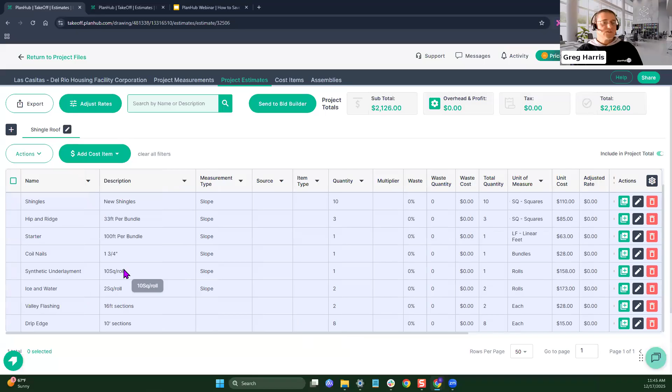On down, we've got the synthetic underlayment. We need one single roll at $158. And let's see, did I add in the description? Yeah, 10 squares per roll. So that makes perfect sense. We're at about just under 1,000 feet. 10 one roll is going to be 10 squares or 1,000 feet. So that one roll of underlayment works perfect.

Ice and water below that, we need two of those. Valley flashing, two of those. And here's the dimensions in the description box so you can keep track of what calculations are being performed to convert those measurements into the quantities of materials, such as ice and water. We need two pieces for valley flashing, and we need 8 pieces of drip edge.

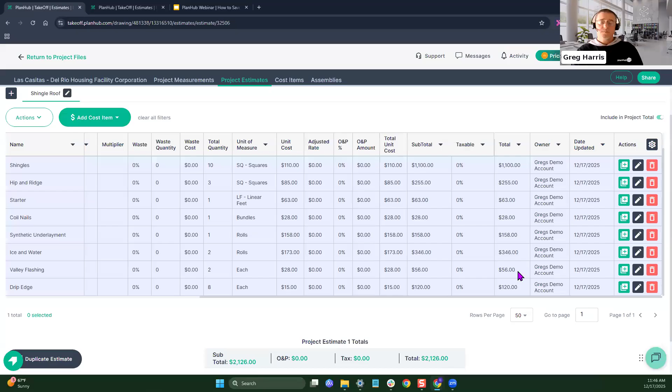Then we've got our totals for each one of the items in the total column. Up at the top of the assembly, there's our grand total for the materials right there.

Boom. Same thing as before. You can expand it open to see all the details. It's always going to present to you on your estimate page as a green header that picks up the name of the measurement that you chose to send through it to launch the process.

So there it is, folks. In about 35 minutes or a little bit over that, maybe 40 now, we've measured and completed the measurements for takeoffs for 2 roofs, had the assemblies built ahead of time. So it made it super fast and easy just to build those out so we can get the total for the materials.

Again, we could have done the labor the same way, calculated along by either the number of squares, square feet, or the roof system. If we figure out time units and attach them to installation of the different materials, we can calculate your total labor off of time units as well. It just depends on so many variables, and how you guys in your specific companies like to accomplish those tasks.

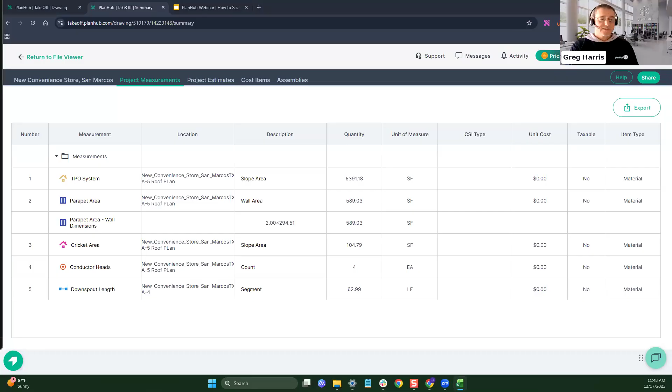This can be exported. I'm going to export using the button in the upper right corner. In the webinar I'm just sharing the window, so I'm not sure if this will show, but it opened in Excel on my other monitor. Hopefully that little spreadsheet is showing on the screen share. Yep, okay good. That is a direct output of the table of measurements.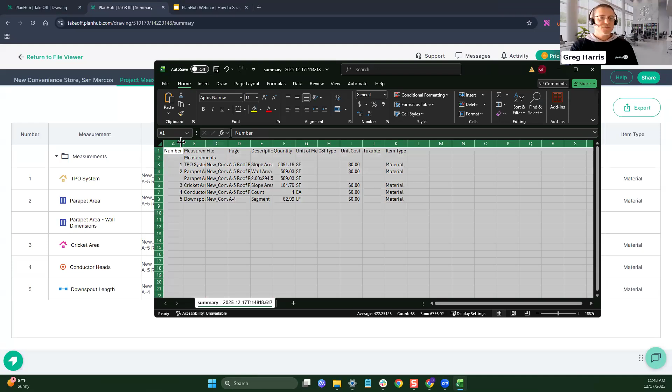So you absolutely can export those measurement results. It's got your custom names in column B, along with your quantities and units of measure over in F and G. So it has all the exact same information we see on the window behind us in the table. That's the measurements.

And we do have an import function for assemblies that was just added a couple months ago. Our product manager, Emily, is on top of this assembly world. She's done so many improvements over the past year or year and a half she's been with us. One of those was the ability to use a template to fill in the assembly items. There's two different ways you can do it.

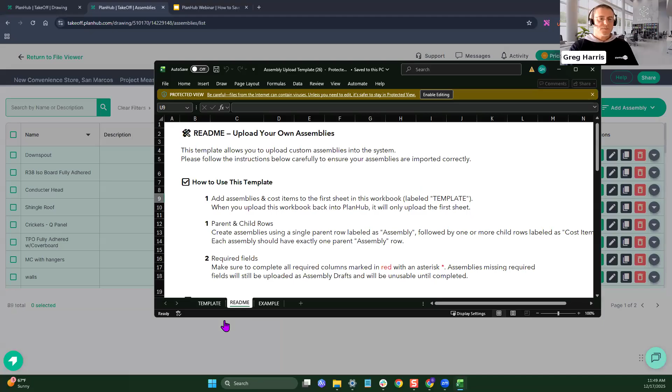You can manually create them window to window, filling in the fields as you build it, or you can just download the template. The template is an Excel or spreadsheet format. If you have Google Sheets as your default, this will open up in Google Sheets for you. It has three pages to it. You've got the README, which gives instructions on exactly how to fill it out.

Then it's got examples of what it should look like afterwards. There are several different assemblies on this list, so it's showing you multiple at the same time. Then the template itself is the sheet you would fill out with the information the assembly needs: the name of the assembly, what measurement tool you're going to use to get the quantities, and your individual items that you need to bill for.

When you're done, let me show you this in real time because I love this example. I've got some assemblies already built up and created in the spreadsheets. So if you take the time and build out your items and fill in all those boxes, when it comes to importing, I'm just going to move over, click add assembly, upload XLS, and browse to the folder where I've got those things stored.

Let's pick out, we'll just re-upload one of these that I've got done. So we'll do another TPO fully adhered with cover board. I'm going to click open, and there we go. Now I'm going to click upload.

That's it. Already got a confirmation banner and it's updating the list. Right here on top is the assembly I just added. It literally takes seconds to upload them off your XLS form if you choose to create them that way. They do need to be in the specific format though, so using that template, at least the very first page of it, is required.

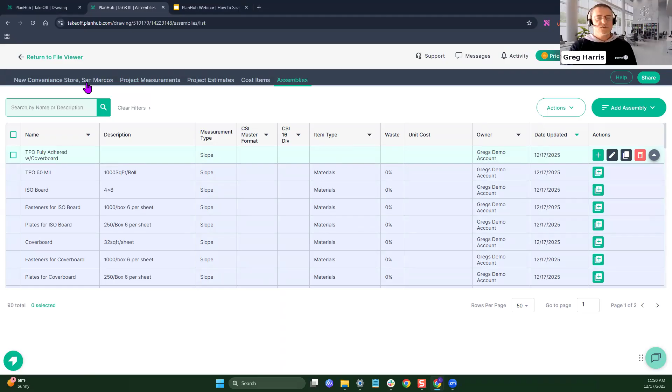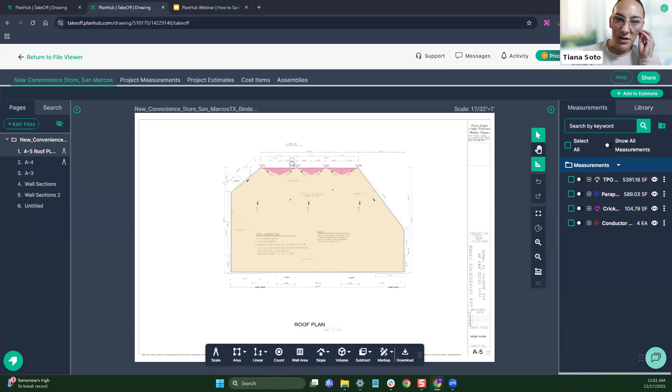What else do we have? It looks like we only had one more question come through, and I believe it was while you were showing the last part of the takeoff. Someone had asked, wouldn't the hip be sloped on this? Oh, okay.

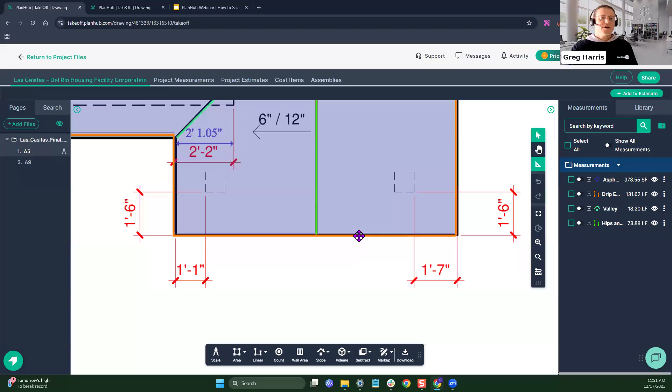Let's see, when I was on the last part of the takeoff, that was on the slope roof over here. I bet they caught out a cheat there. Absolutely, you caught me red-handed right here on this gable end. I did use the linear tool and calculated that with a 2D dimension, strictly for time. We could have done it independently, and I'll do it right now live to show you.

If we're gonna add that slope in, we'll start the slope line tool, set that at 6/12, and end up with a linear dimension and a slope dimension that we'll add together and input into the assembly for that item. So we could call this the gable drip edge. Click set, and then we'll measure this as a 6/12 slope all the way across.

Also on that back gable, same thing. I'm gonna click the continue switch over here on the right side, and we're gonna zoom in. Let's measure this back gable as well, all the way across, because those two angles share the same slope. And there's our additional measurement, 26.10 feet.

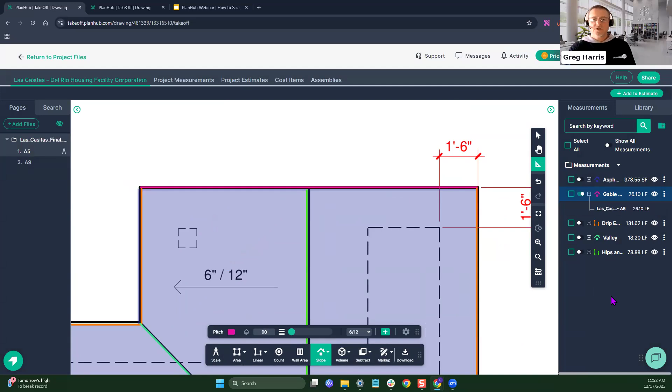And if we want to be very precise, we would need to go back in and pull out the straight line measurements that went across those as well. But good eye, absolutely, you are correct. You can use multiple tools to get the measurements you need if you need to.

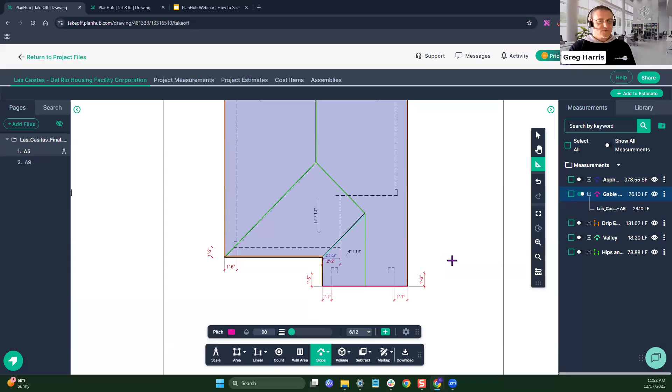Honestly, sometimes on drip edge, my driving force there was, you know, those are 10-foot sections, so if I have a couple of feet left over, no problem. I can use that to make up a corner on the job, or maybe on this one later, something of that nature. So it wasn't that important to me that I hit the specific amount of estimating material on that particular item. I was leaving a little buffer in there to get some extra material if we need it.

Perfect, thank you so much for answering that, Greg. It looks like someone just dropped in. Does it calculate the 2-foot taper fill?

The 2-foot taper fill, so I am not a roofing contractor by trade. So if you wouldn't mind, could you give us a little bit of detail on what you mean by the taper fill?

Norberto, if you wouldn't mind dropping that in the chat for us. It looks like Maria made a comment that the measure is called rake. Not sure what she's referring to there.

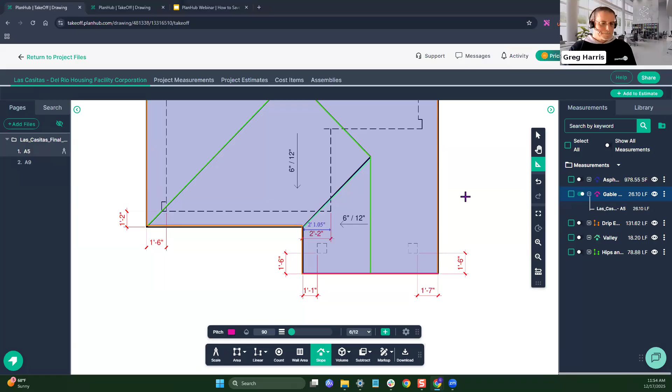Maria chimed in again. She says, I want to know how to use the library. Yeah, no problem. So the library here in the takeoff world, um, is—there we go. If I click over, it's got the list of all the assemblies created for the entire account.

But also it's got saved measurements. So if you perform the same measurements from job to job, which most contractors do, it becomes very repetitive over time. You can set up those measurements, use them one time, and then save them to your library. I'm just going to collapse all my folders down here.

It's as simple as we can click the new folder button up on the right side of the search panel. Click that, it's going to add a new folder to the bottom. I can right click and rename, so this is going to be a sample.

You know what? Let's just name it roof. That's our topic for today. So we're just going to call it roof. That gives us a destination to save measurements specific for that use.

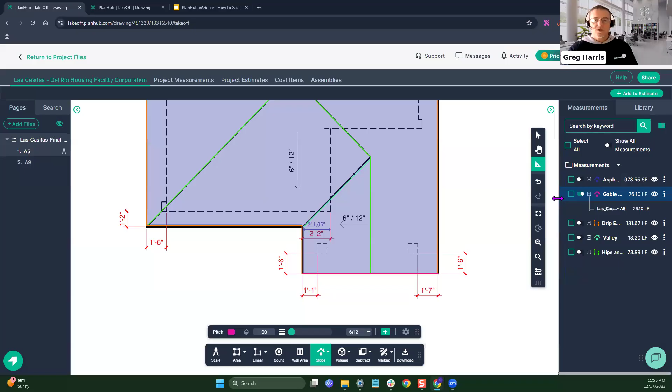Over here in the measurements panel, where I've done the asphalt area for this particular job, we can right click on that and open the properties. What we're going to be saving is the name, description, unit cost, item type. Slope factor will not save because that's independent per project, so that will need to be set when you use the saved measurement.

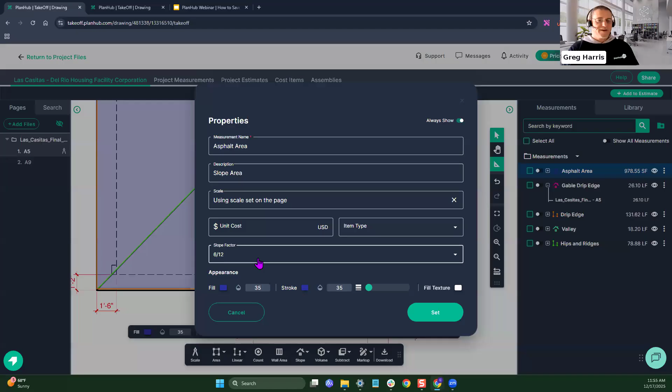And that's logical. Every plan's a little different on the slope. Even though you do some of the same low slopes repeatedly, you're still going to need to set the slope factor. You don't want to automatically assume the slope. And the colors will also save. That's what you will save out of the box.

So I'm going to right click on the result, drop down and hover over libraries, then left click to drop it into that roof folder. So the next time I come to a project where I need to measure the asphalt area for shingles, I can go to my library, open up the roof folder, and right there there's a plus symbol. Click it to start.

We're going to set the slope factor for what we need it to be, then click set. Then we're off and running measuring with that tool in a brand new instance of the measurement. So if you take the time to set those measurements up the way you want to see them in the future, save them to the library, and you can use them off of the library with just a single click moving forward.

Perfect. Hopefully that answers your question, Maria. All right, it looks like we got a little bit more elaboration.

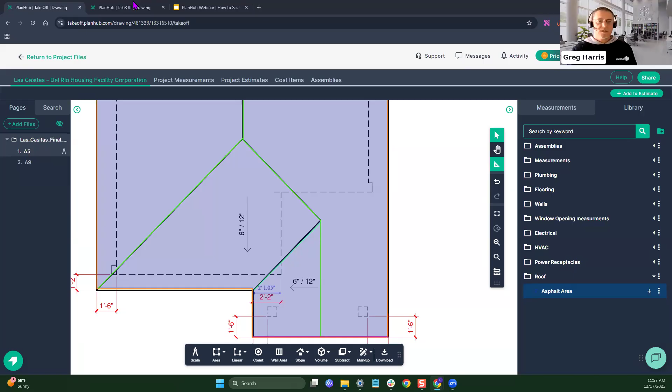So yeah, it absolutely can. Anything that we can create a formula for. Let me show you what the formula world looks like here in the assembly so you'll get a picture. So any of the items, let's just take that TPO fully covered board.

We'll edit that and take a look at the TPO for instance. So if we open up the formula we created to calculate the total amount of TPO, we took the area that we measured off the main roof, added that to the area that was provided by the parapet, and then divided it all by 1,000 square feet, because that's how many square feet are in a roll of material.

So that's a formula we manually create when we work with you to set up your assemblies and help you get started down that road. So the answer to the question is absolutely, it can calculate anything at all automatically as long as we can create a math formula together that will achieve that desired result.